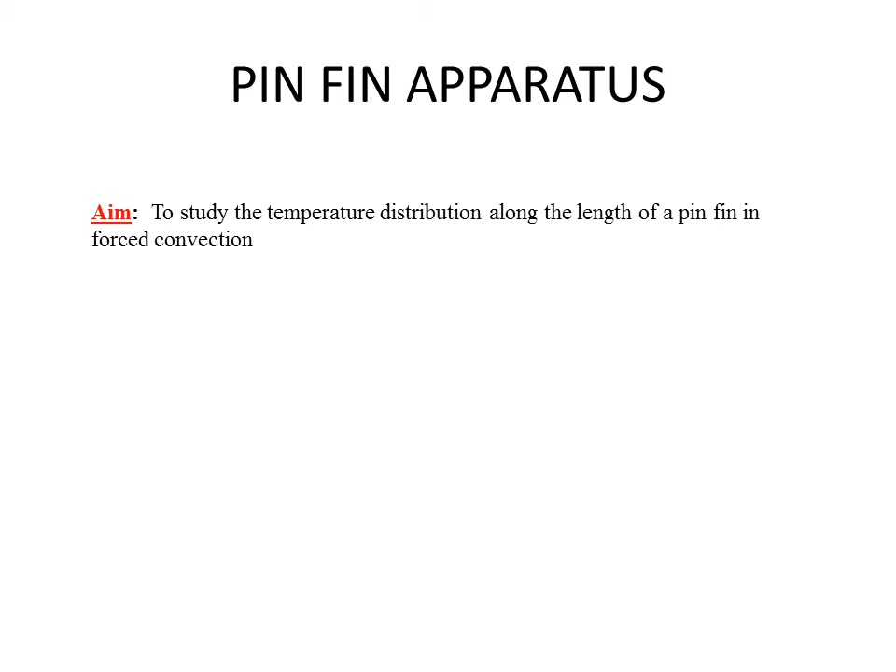Theory: extended surfaces or fins are used to increase the heat transfer rate from the surface to a fluid whenever it is impossible to increase the value of the surface heat transfer coefficient or the temperature difference between the surface and the fluid. The use of fins is very common and they are fabricated in a variety of shapes.

Circumferential fins around the cylinder of a motorcycle engine and fins attached to the condenser tubes of a refrigerator are a few familiar examples. The temperature difference with the surrounding fluid will steadily diminish as one moves out along the fin. The design of fins therefore requires a knowledge of the temperature distribution in the fin.

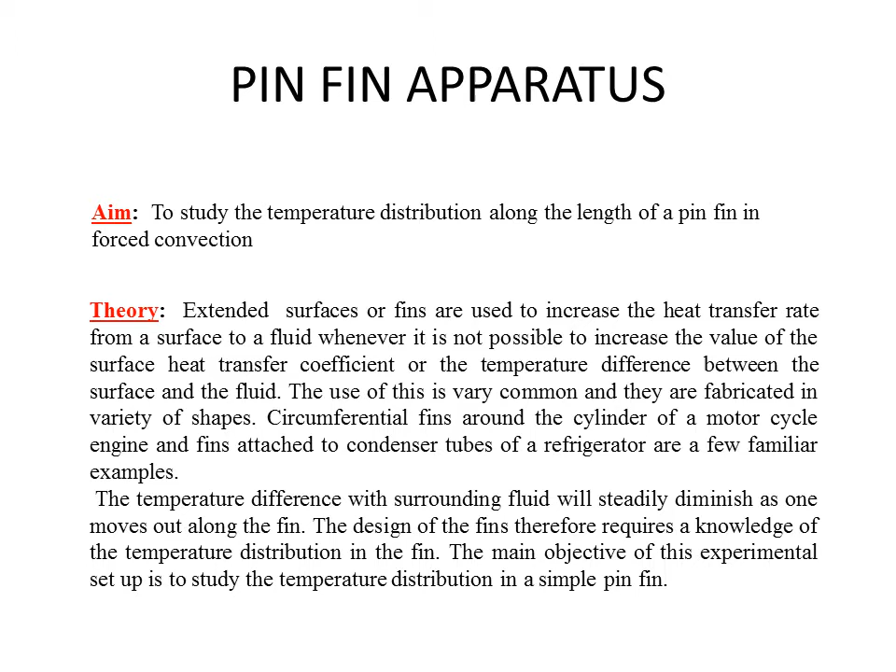The main objective of this experimental setup is to study the temperature distribution in a simple pin fin. Description and specification of the apparatus.

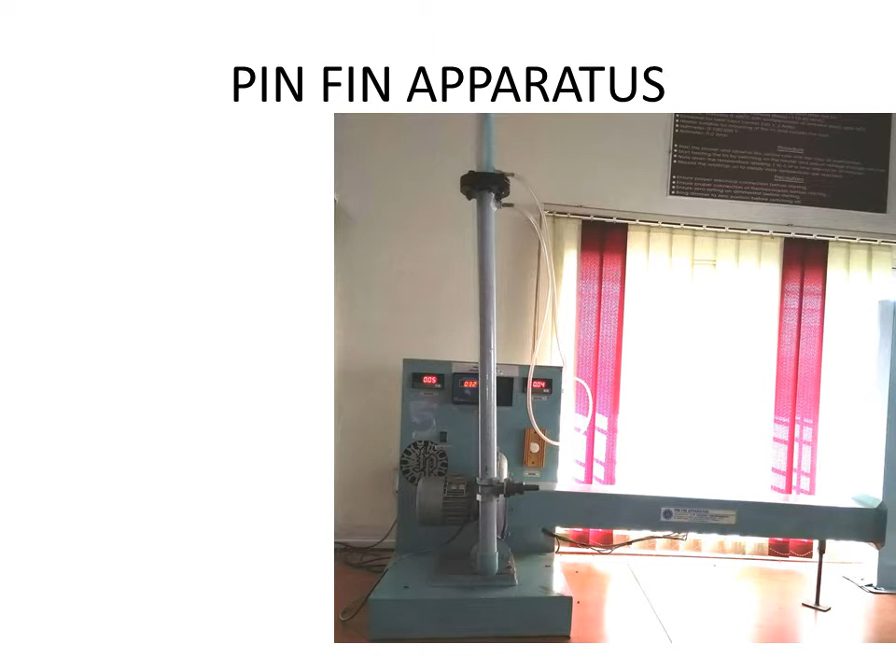A brass fin of circular cross section is fitted in a long cylindrical duct. The other end of the duct is connected to the suction side of the blower and air flows past the fin perpendicular to its axis.

One end of the fin projects outside the duct and is heated by a heater. Temperatures at 5 points along the length of the fin are measured by chromel-alumel thermocouples connected along the length of the fin. The air flow rate is measured by an orifice meter fitted on the delivery side of the blower.

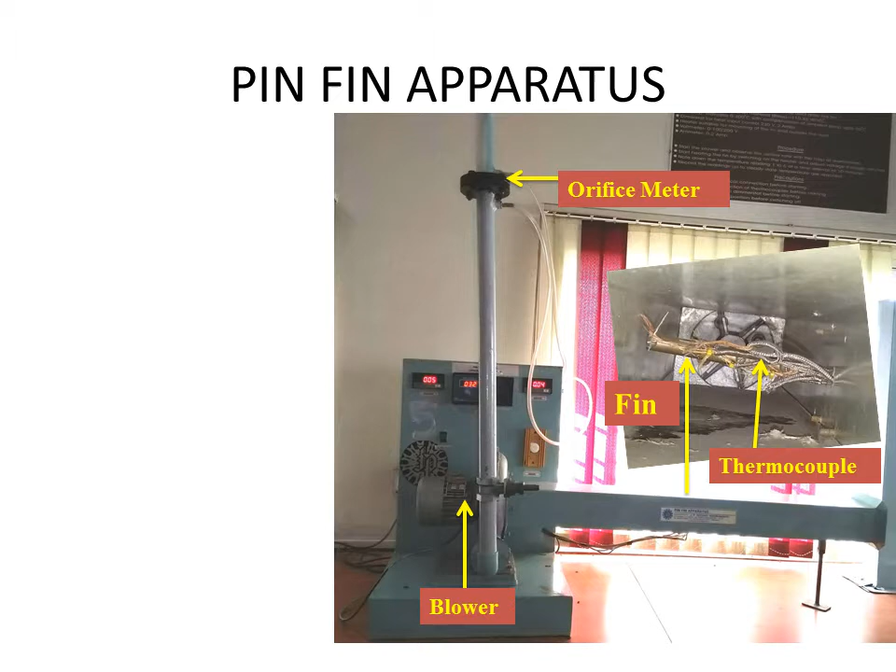Specifications: duct size is 15 cm by 10 cm. Diameter of the fin is 12.7 mm. Diameter of the orifice is 1.4 cm. Diameter of the delivery pipe is 36 mm. Coefficient of discharge of the orifice meter is 0.64.

Centrifugal blower, half HP single phase motor. Number of thermocouples on the fin are 5. Thermocouple 6 reads the temperature of air inside the duct after the fin.

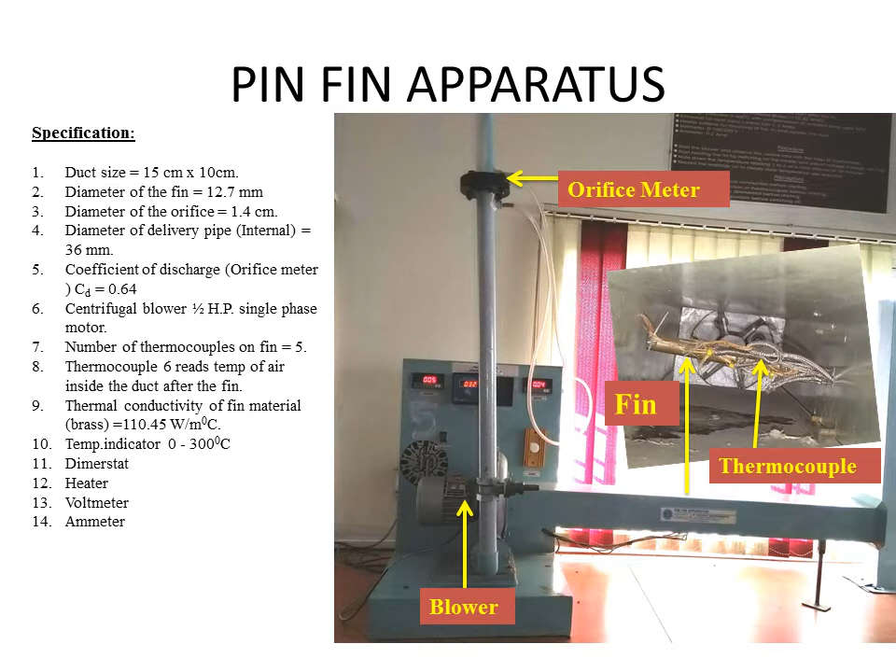Thermal conductivity of the fin material is 110.45 watts per meter degree Celsius. Temperature indicator ranges from 0 to 300 degree Celsius. Dimmerstat, heater, voltmeter and ammeter are provided.

Procedure: start the blower and observe the airflow rate with the help of a manometer. Start heating the fin by switching on the heater and adjust the voltage through the dimmer. Note down the thermocouple temperature readings 1 to 6 at intervals of 10 minutes. Record the readings until steady state temperatures are reached.

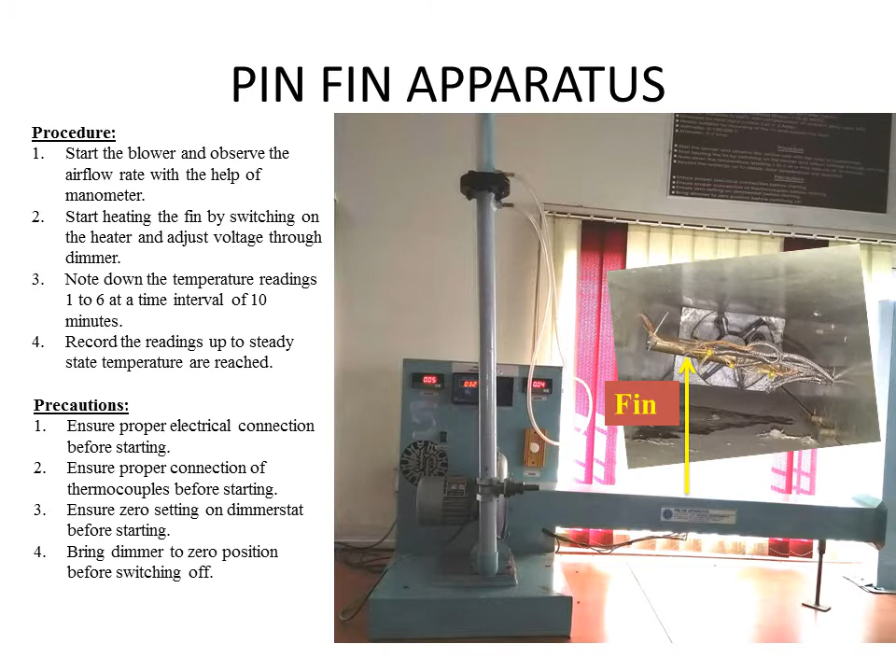Precautions: ensure proper electrical connection before starting. Ensure proper connection of thermocouples before starting. Ensure zero setting on the dimmerstat before starting. Bring the dimmer to zero position before switching off.

This is the setup for the pin-fin apparatus, used to determine temperature distribution and to find the efficiency of the fin. So the important thing is how to start the setup. Main supply is given to the switch.

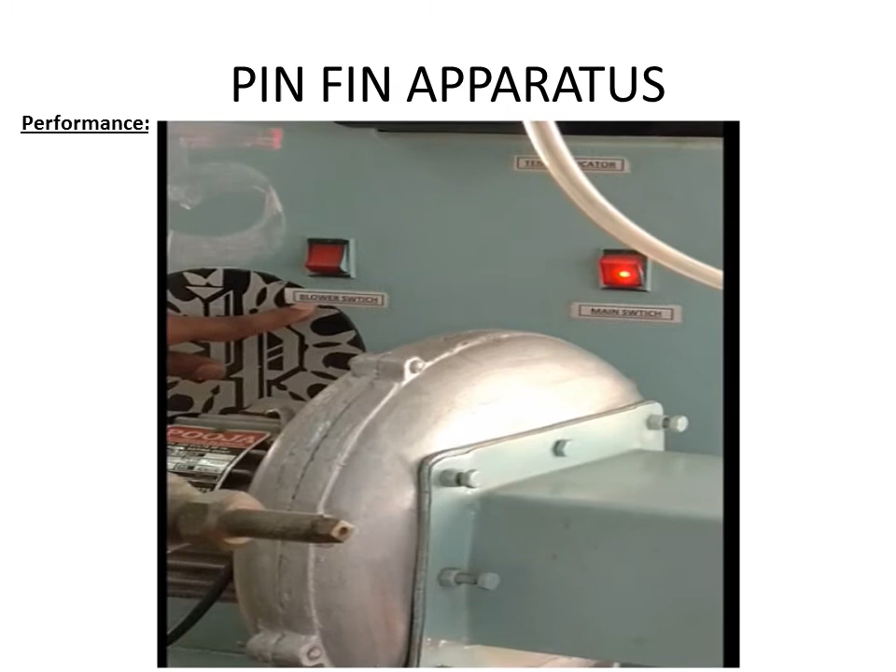Already the switch is in the on position. Now you have to turn on the main switch. Here you can see two switches - the second one is the blower switch, and the first one is the main switch you have to turn on. You can see the voltage and current are at zero position. What you have to do is slowly increase the dimmer and give a certain voltage inside the setup. Now you can see the voltage is about 93 and the current is at 0.40.

Now we have to wait for 2-3 hours to reach steady state. After 1 hour you have to turn on the blower switch to take down the readings. So before taking the readings, we will turn on the blower switch and then take the readings. Now we will see the setup for the pin-fin apparatus.

So this is actually the setup. What is the aim of this experiment? As you know, we need to find the temperature distribution along the length of the fin, and also we need to find the fin efficiency of that particular fin. Now all of you can see the setup. It is quite similar to what we studied earlier.

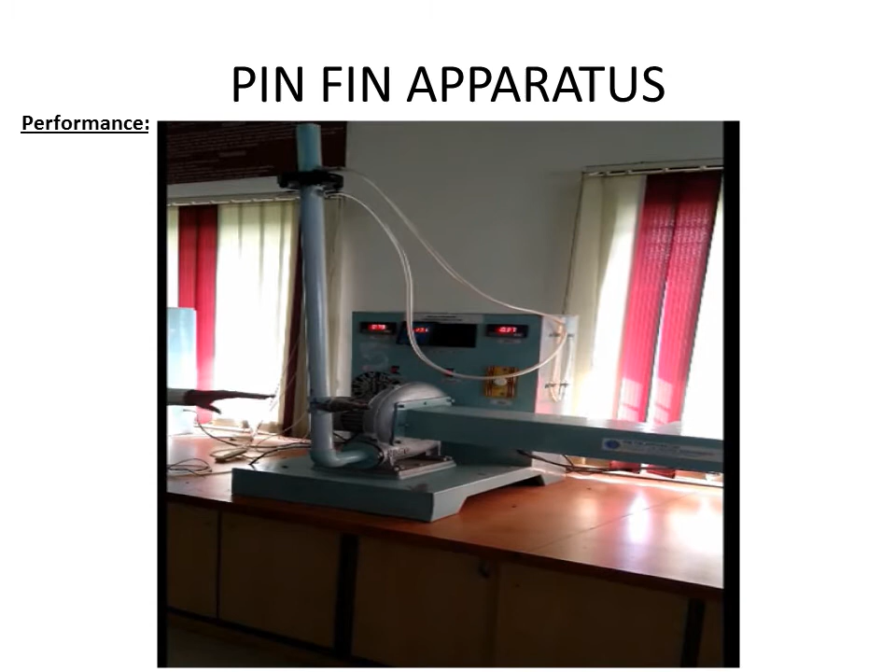You can see in front of you one blower which is to be connected, and the main switch is there. Near the main switch, the dimmer is there to change the voltage and current. This is the voltmeter, this is the ammeter, and this is the temperature indicator where the readings are shown for the different temperatures.

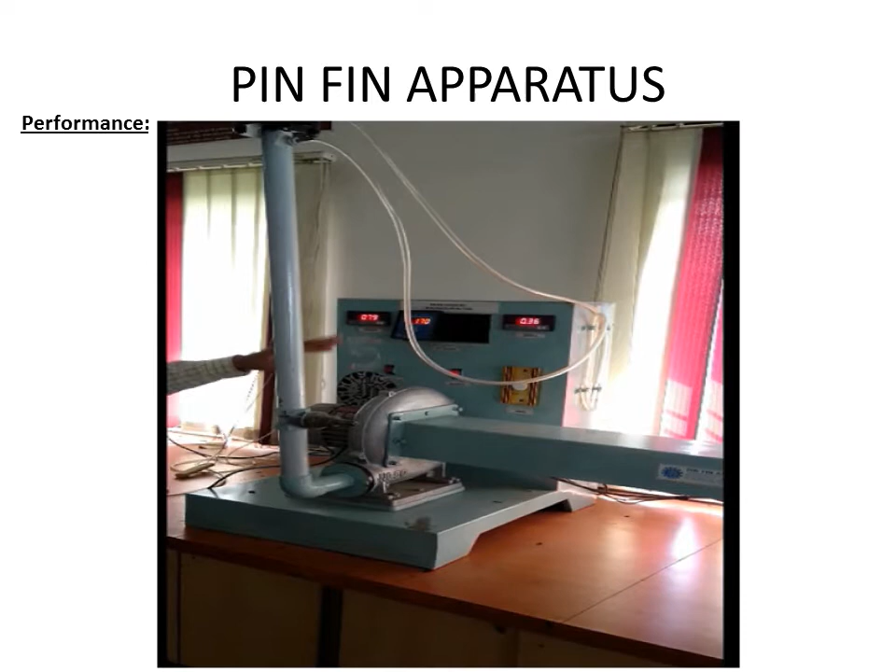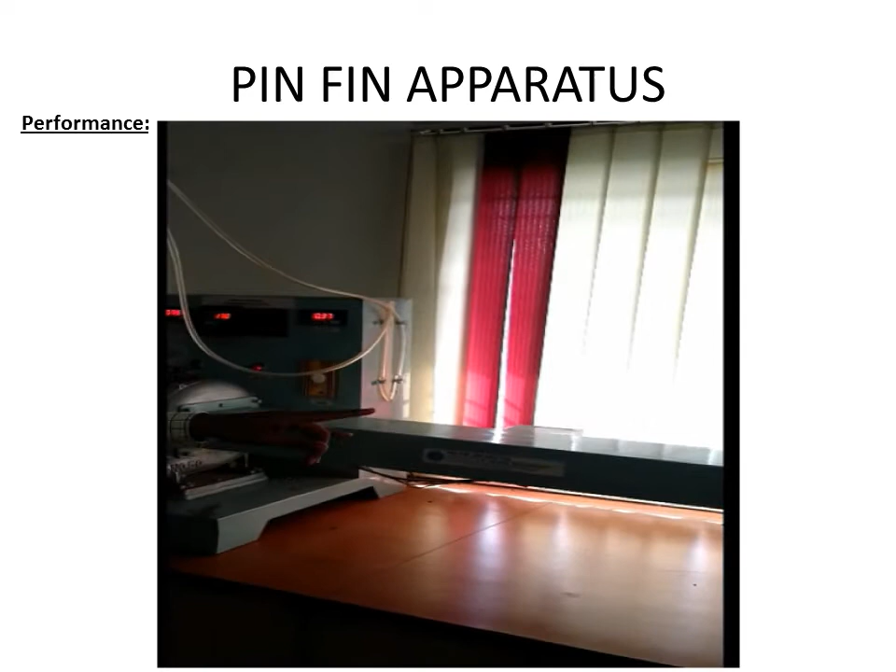So in this particular setup, you can see a very long duct. Basically we are finding the fin efficiency in the presence of forced convection, and you can also see at the right hand side that the duct is open, so this will be natural convection as well. So if you want to see the setup of the fin, you can see it here.

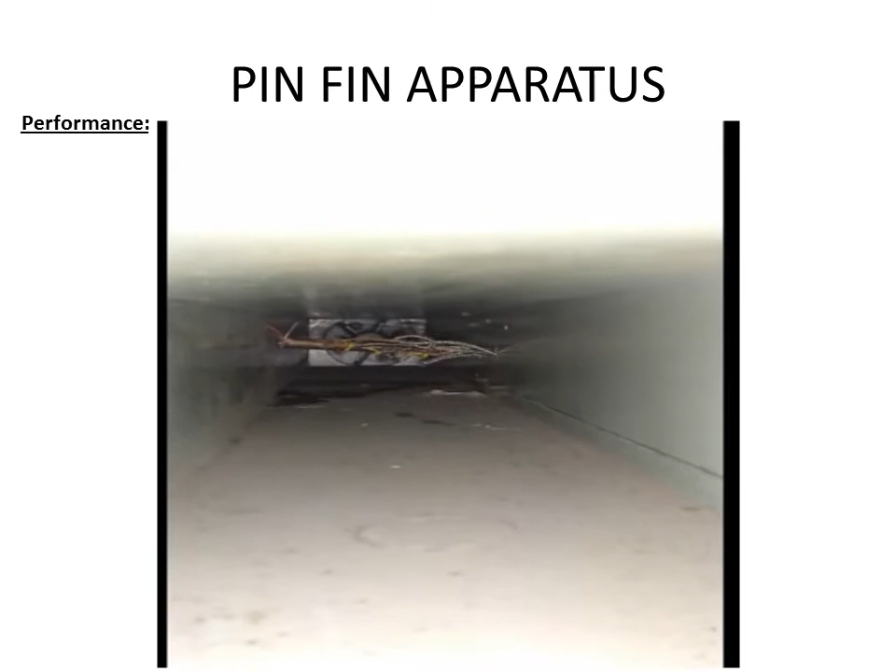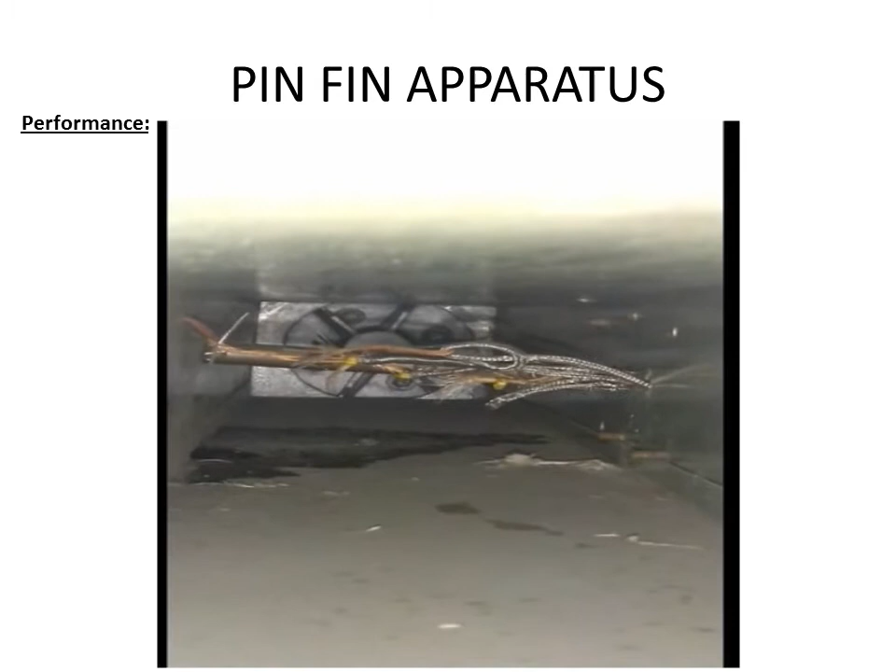So you can see at the middle, one long fin which is a brass material, not copper, coupled with 5 thermocouples mounted along the length of the fin. So T1 to T5, and one more thermocouple which will record the air inlet temperature.

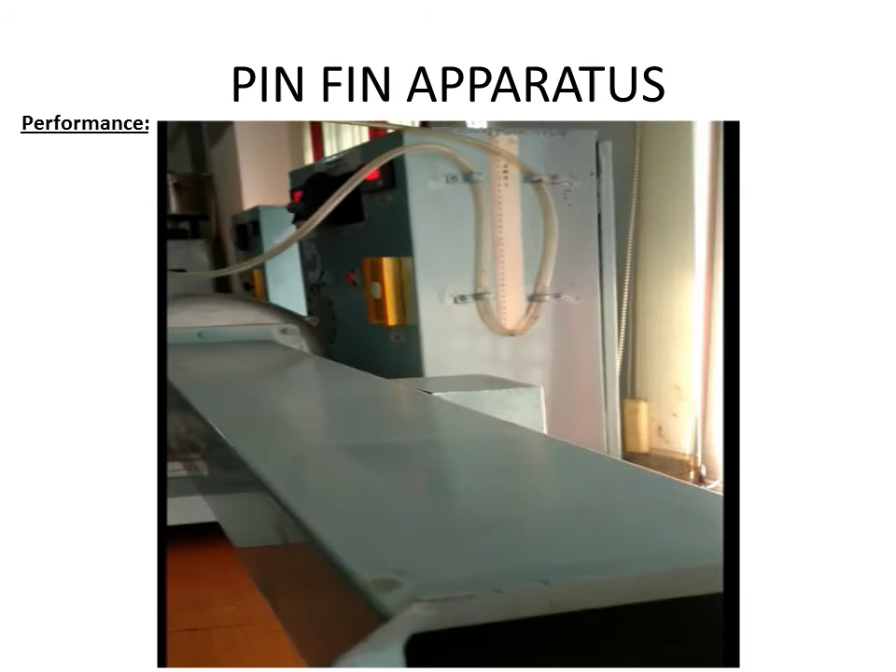Also you can see, to find the velocity of the air, one U-tube manometer is coupled to find the head across the water, and that manometer is coupled to the orifice meter where the outlet of the air is.

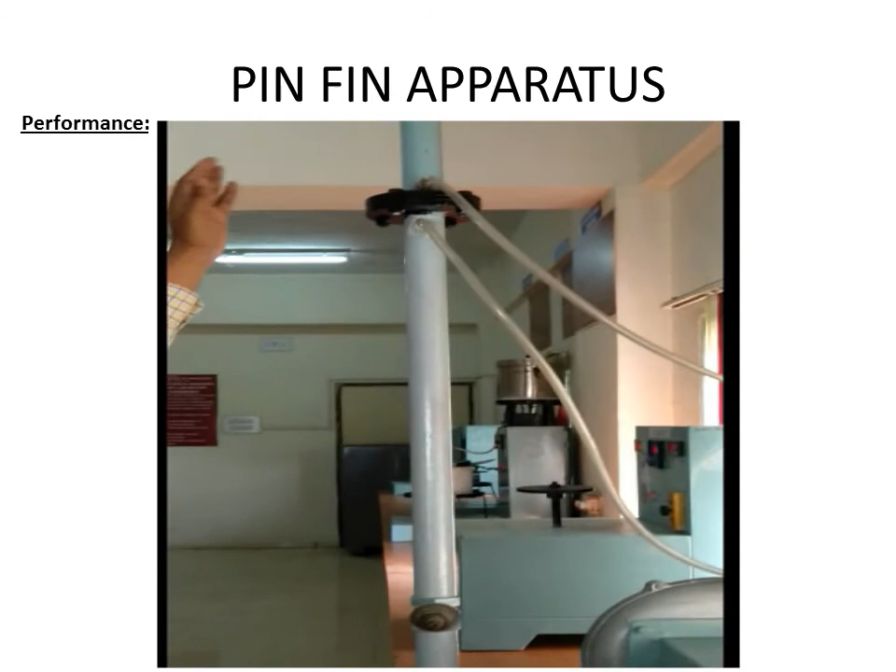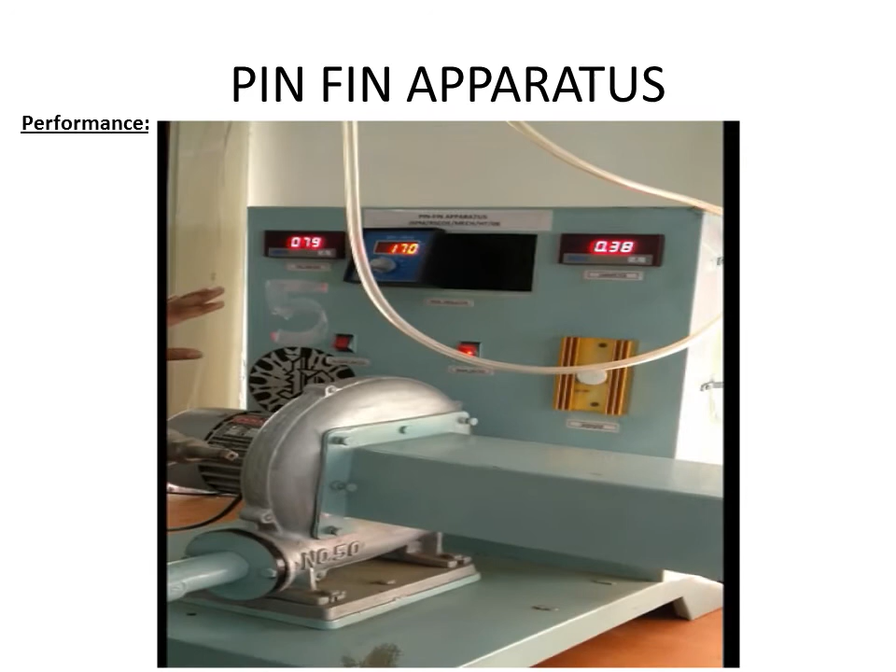Now here one more switch you can see, this is actually a blower switch. So when we take the reading, we will turn on this blower switch, and one by one we have to take the reading: first voltage, current, then temperature T1 to T6, and head across the water. So these readings we have to take.

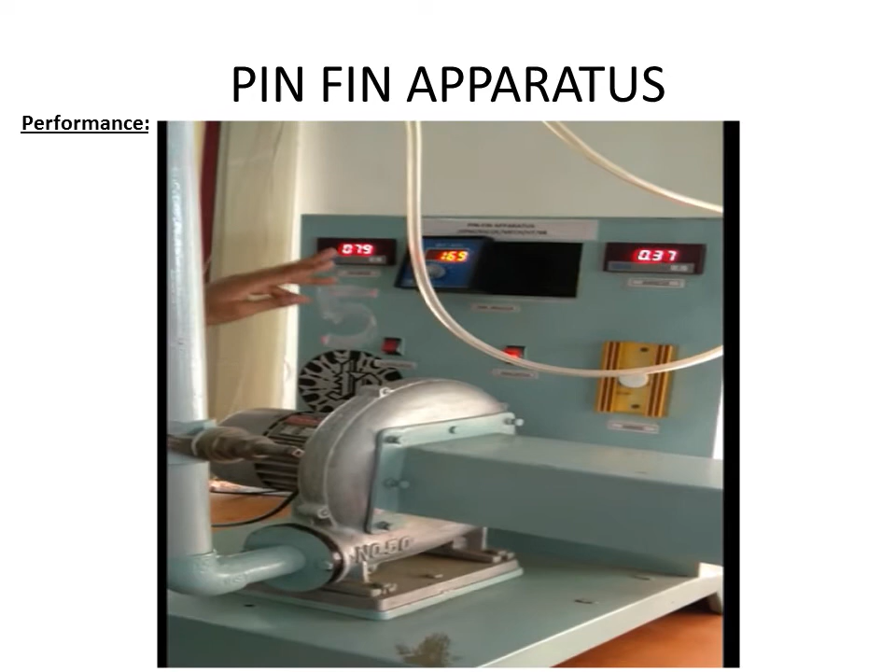Now I will turn on the blower, and one by one we will note down the readings. This setup is already started, so this has reached steady state. You can see temperature is constant with respect to time. Now we will take the readings.

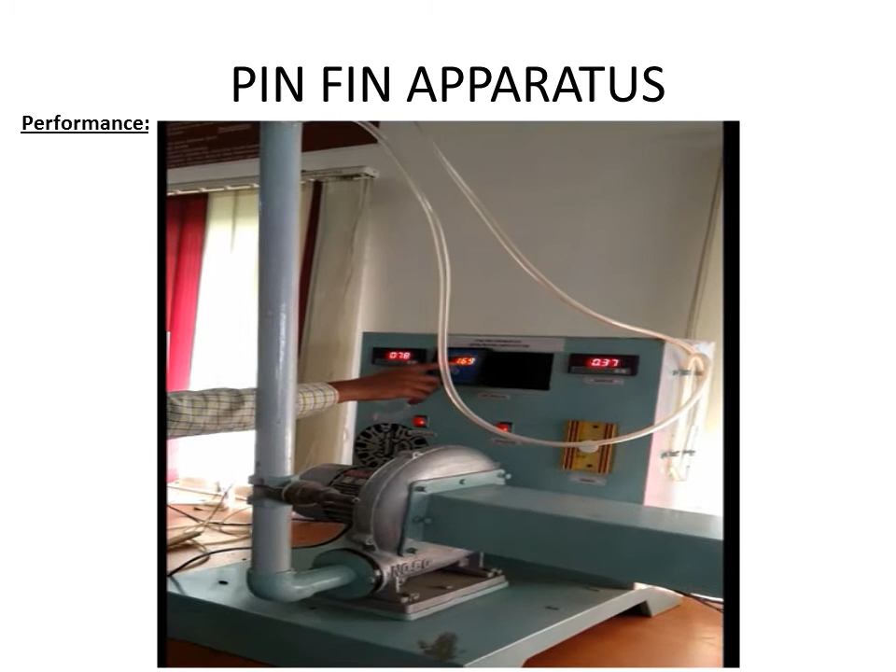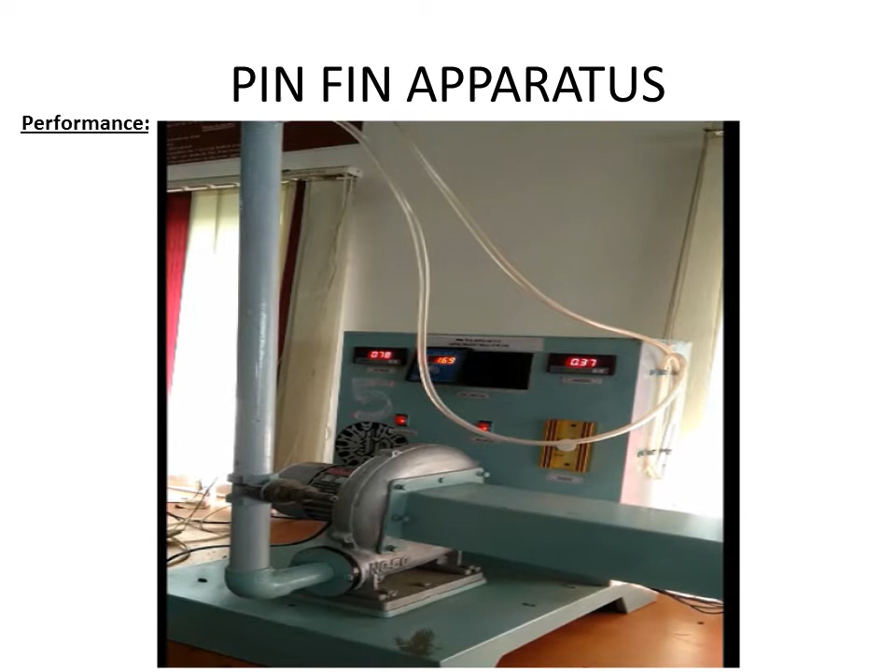Now the temperature T1. Before temperature, first of all we will take the voltage and current. Temperature T1.

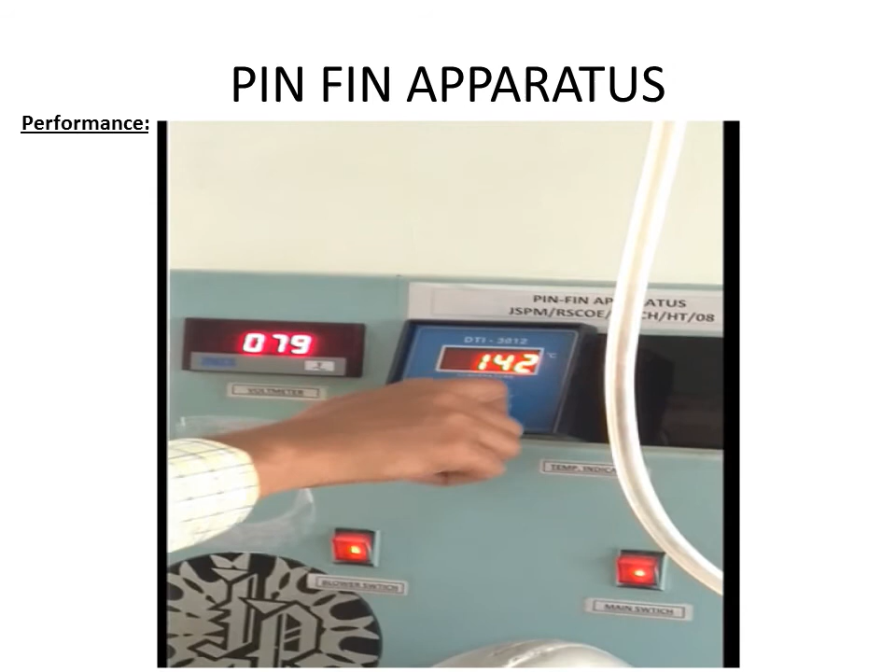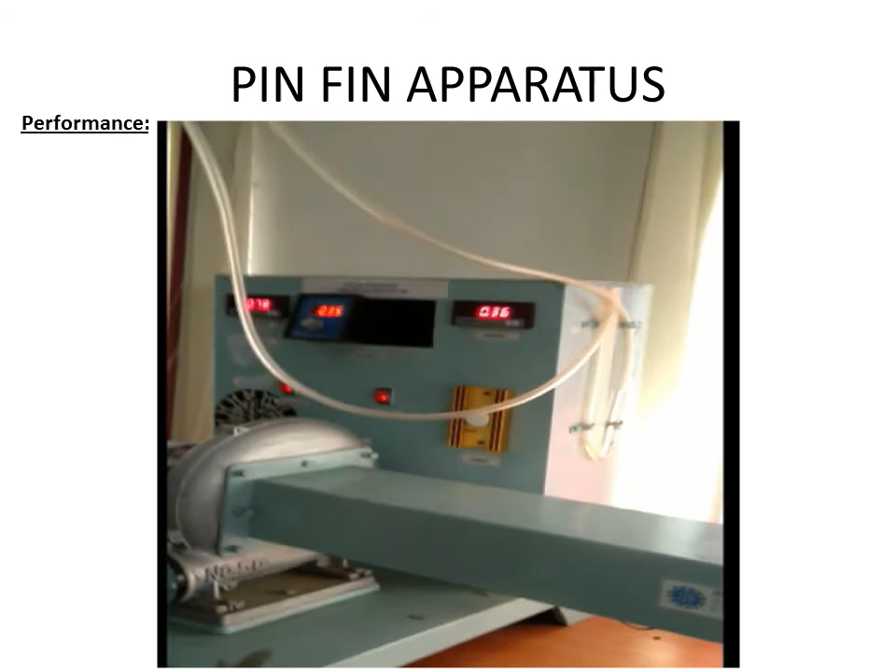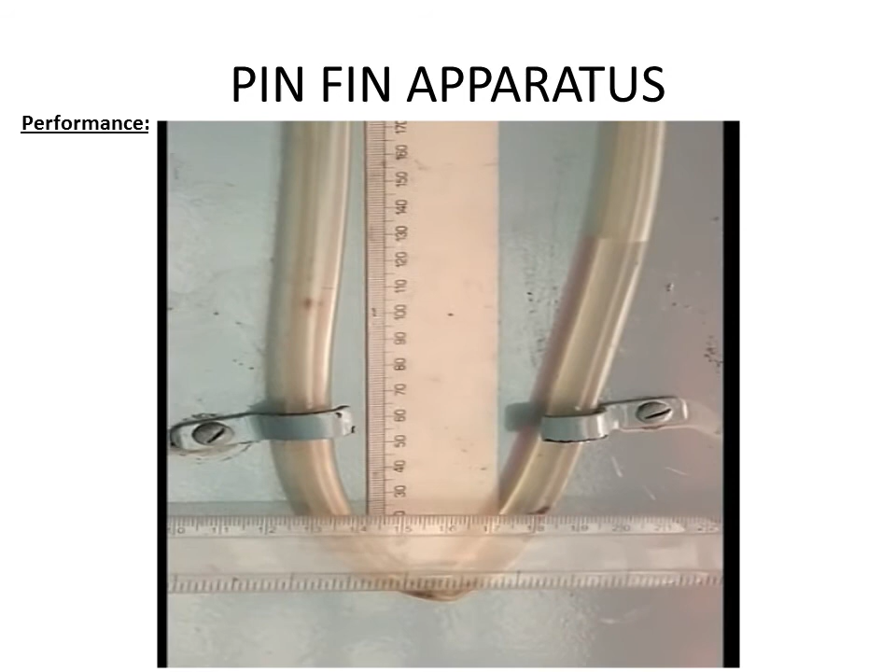Here you can see the 130 mm, and at the bottom you can see the 20 mm. So 130 minus 20, that will be 110 mm head across the water.

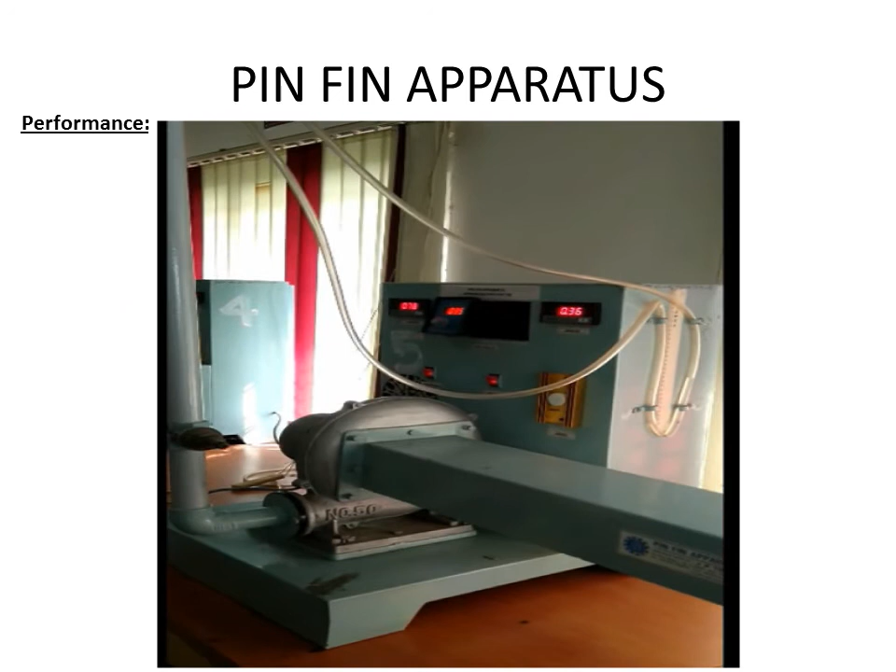Observations: voltmeter reading 78 volt, ammeter reading 0.37 ampere. Manometer level difference is 110 mm.

Observation table: T1 temperature reading is 168 degrees Celsius, T2 temperature 159 degrees Celsius. T3 temperature 151 degrees Celsius. T4 temperature is 130 degrees Celsius and T5 temperature is 142 degrees Celsius. Ambient temperature T6 is equal to 36 degrees Celsius.

Calculation. In this experiment, we need to calculate the efficiency of the pin fin. We assume the fin is insulated at the tip, hence the efficiency formula is hyperbolic tan of m into L divided by m into L. In this formula, we require the m value, but the m value depends on the convective heat transfer coefficient, so we need to calculate that also.

This convective heat transfer coefficient depends on the Nusselt number. To calculate the Nusselt number, we have one correlation which depends on Reynolds number and Prandtl number. To find the Prandtl number, we need to use the properties of air at mean film temperature, hence we need to calculate the mean film temperature also.

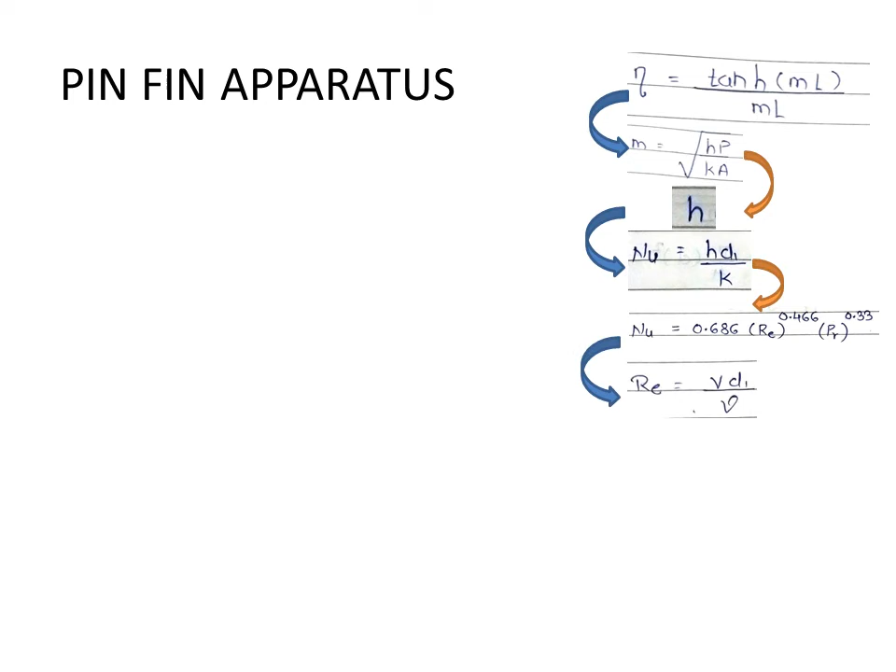This Nusselt number also depends on Reynolds number, which requires the velocity value. This velocity depends on the air discharge, which we can find with the help of the orifice meter. But to find that discharge, we require the head of air, and this head of air we can find with the help of manometric reading.

Calculations. Average surface temperature across the fin is 149.8 degrees Celsius and atmospheric temperature is 36 degrees Celsius. Hence, mean film temperature is 92.9 degrees Celsius.

At 90 degrees Celsius, the properties of air are: density is 0.9718 kg per meter cube, thermal conductivity of the air is 0.0302 watt per meter Kelvin, kinematic viscosity 2.201 into 10 raised to minus 5, and Prandtl number is 0.7132.

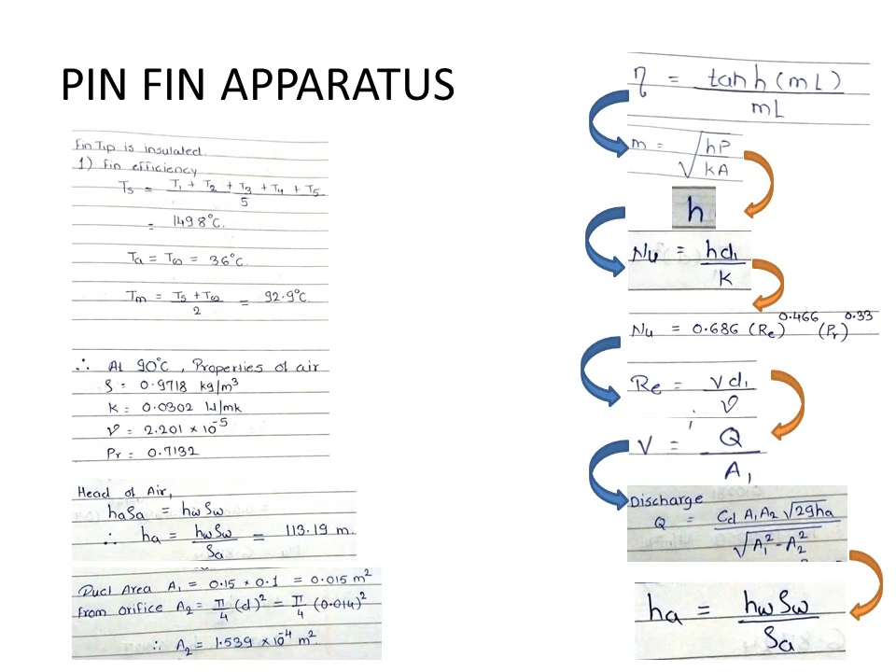Head of the air is 113.19 meter. Duct area A1 is 0.015 meter square, and from orifice area A2 is 1.539 into 10 raised to minus 4 meter square. Therefore, the discharge value is equal to 4.64 into 10 raised to minus 3 meter cube per second.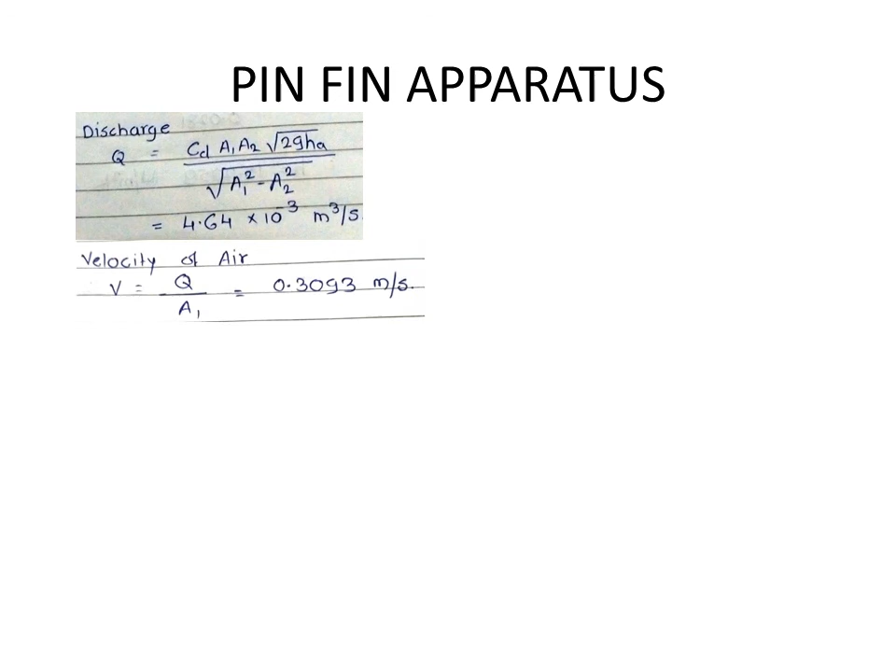According to the discharge, velocity of air is equal to 0.3093 meter per second. Once we get the velocity of air, we can calculate the Reynolds number, and the value of Reynolds number is equal to 178.469.

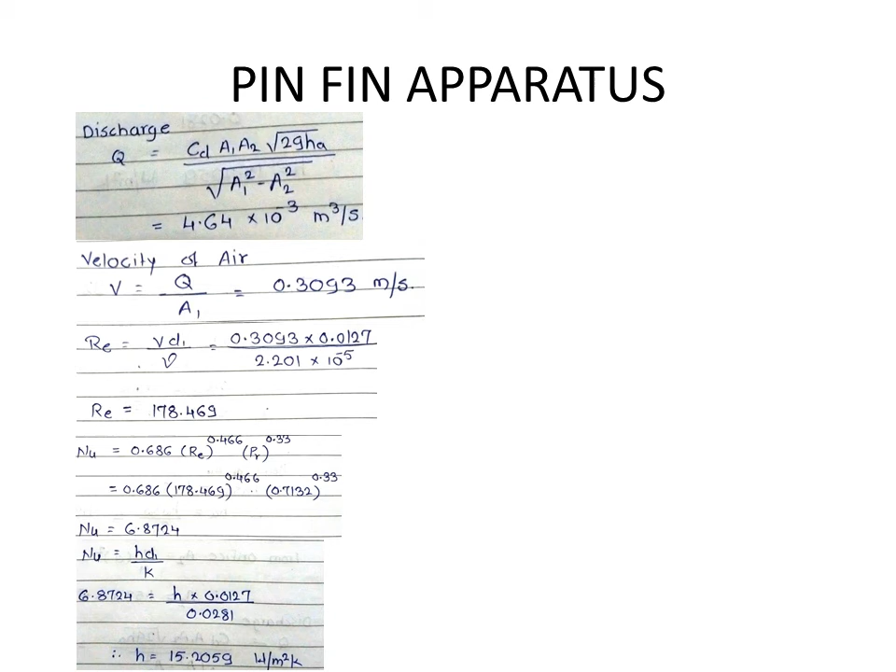So with the help of Reynolds number and Prandtl number, we can calculate the Nusselt number. So Nusselt number is equal to 6.8724. Once we get the Nusselt number, from that we can calculate the convective heat transfer coefficient, and the value is 15.2059 watt per meter square Kelvin.

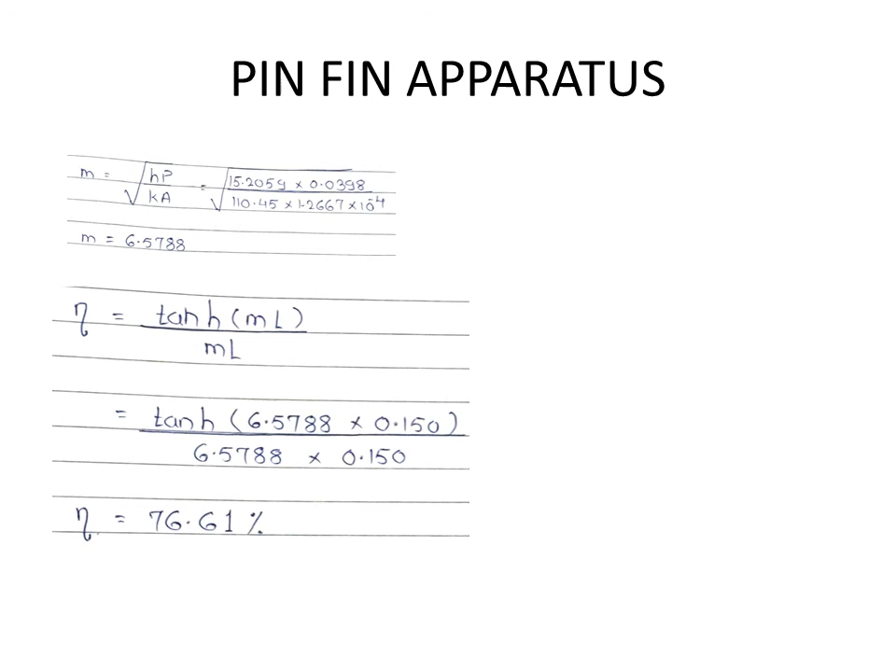Temperature distribution across the fin. So temperature distribution across the insulated tip end fin is T minus TA divided by TB minus TA, equal to hyperbolic cos of m into L minus x divided by hyperbolic cos of m into L. So after putting the value in this equation, we get the temperature distribution at various locations on the fin.

Hence, at 0 position, the temperature is 168 degrees Celsius. When x is equal to 0.03, the temperature value is 150.8 degrees Celsius. When x is equal to 0.06, temperature value is 137.99 degrees Celsius. When x is equal to 0.09, the temperature value is 129.22 degrees Celsius.

Similarly, when x is equal to 0.12, the temperature value is 124.09 degrees Celsius, and when x is equal to 0.15, at that time the temperature is equal to 122.40 degree Celsius.

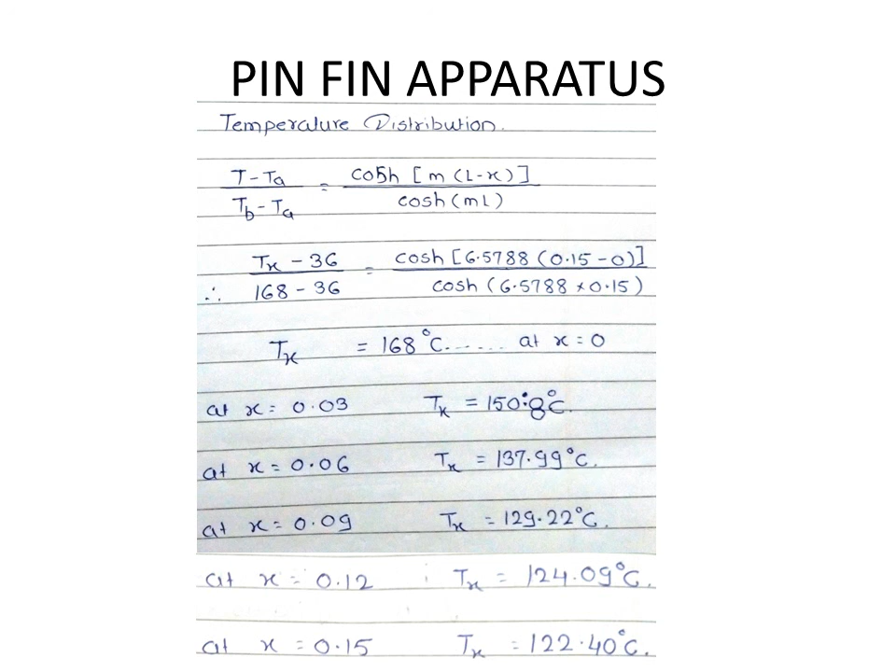Results: convective heat transfer coefficient is 15.2059 watt per meter square Kelvin, and the efficiency of the fin is 76.61%. Thank you.